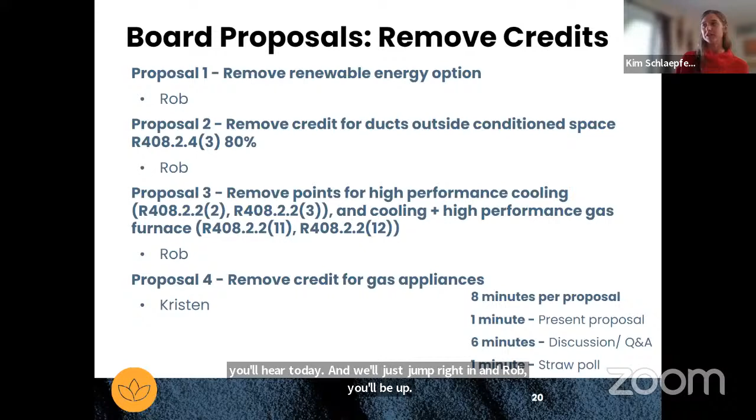So this is an overview of the 4 proposals you'll hear today, and we'll just jump right in. Rob, you'll be up first, but we can go through yours one at a time because they're all kind of different in their outcomes.

My concerns with the renewable energy option are the same as they've been in every other time we've discussed: it really doesn't necessarily apply. It's energy, it's generation, it's not conservation. It's changing how energy is dumped into the system instead of pulling energy out of the system. The interconnections, system designs, and effects it's going to have on the distribution grid, on distribution system design, substation design, are all costs that are unaccounted for. If we do onesie-twosie houses with PV added, that can certainly be absorbed, generally speaking, by the grid. But if we start making this very widespread, it creates upstream challenges for us. So I'd rather the conservation code focus on energy conservation, pulling energy out of the system, instead of how it's dumped into it.

Thank you, Rob. Okay, we'll open it up for Q&A and discussion. Any board members have questions or thoughts on Rob's proposal?

Elizabeth: my only thoughts are, if the board chooses to accept this, you have to make everything else align with it. So if you take away renewable energy as a benefit to this path, it's got to be considered under ERI and R405 as well. Thanks, Elizabeth. Kim?

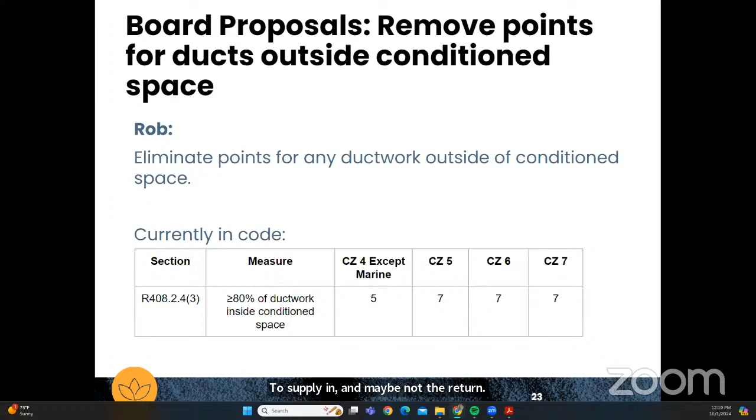Thanks, Elizabeth. Andrew: Just conceptually, the 80% - my understanding was more that potentially a builder could maybe get the supply in and maybe not the return, and that the return may be 20%. I've seen some plans like that. Yeah, good example. Okay, thanks, Andrew. Thanks, Elizabeth.

Other questions, comments on this proposal? Okay, I'm not seeing any hands, so I think we'll move to our straw poll. And I'll stop my timer before it scares me. Okay, so, oh yep, Kim, go for it.

Sorry, just trying to really understand and think about the projects that I've seen as well, where there are some situations where 100% is not really able to be achieved very easily. And just wondering whether a compromise might be to lower the points available so that instead of the points being almost as much as 100% of ductwork inside conditioned space, it's less than that.

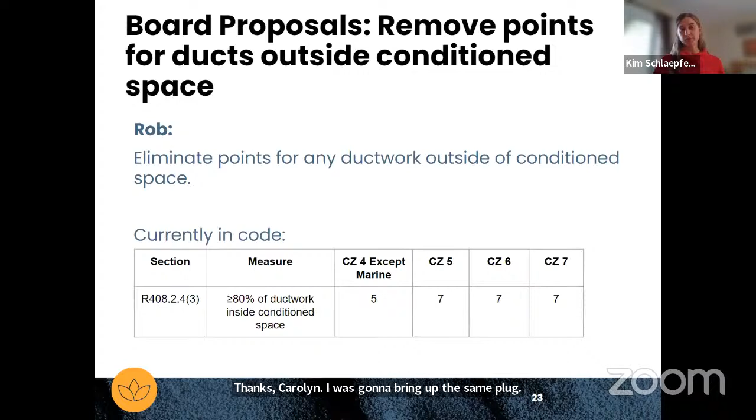I'll just offer the only challenge with lowering the points is we still have to stay consistent with the energy outcome that these are all supposed to be calibrated around. Gotcha. So thank you, Carolyn. I was gonna bring up the same flag. Okay, awesome, not seeing any other hands.

We'll move to our straw poll. So, does the board want to remove the credit option for ductwork outside of conditioned spaces? And again, sorry that the language in this slide is not clear - this is for the 80%. So let me just actually put that in, right, just so we make sure we are very clear, crystal clear on what we would be voting on.

So this would be to strike the 80% option, R408 - so it would be 80% inside conditioned space, not outside. Yeah, thank you, sorry. Okay.

Okay, so option A is to accept this proposal, which would mean striking this as a credit option. Option B is not accepting this proposal, which means the credit option stays in, and option C is an abstain vote. Board members who would like to vote for option A, please raise your hand.

Okay, thank you guys, I see 2 votes for option A. Option B, if board members would like to vote for option B, please raise your hand. Okay, thank you guys, I saw 11 hands for option B. For option C, please raise your hand if you'd like to abstain. Okay, thank you guys, I see 2 votes for option C.

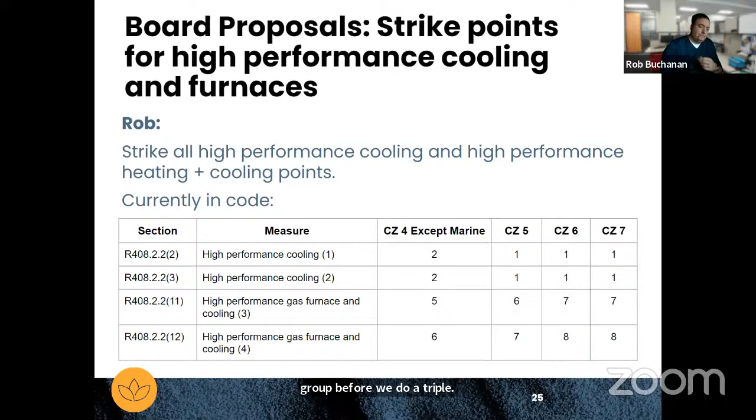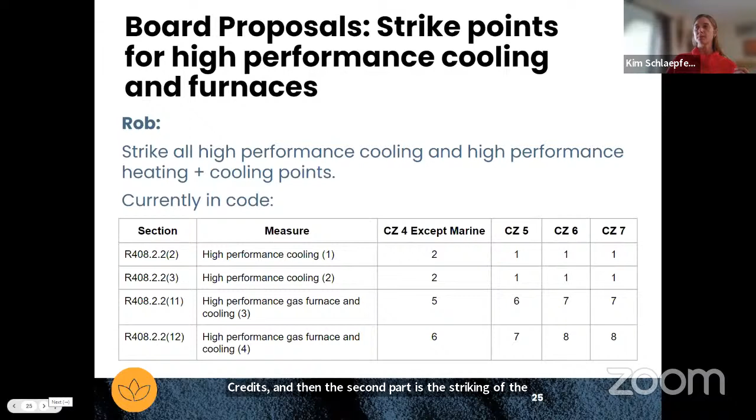Thanks, everyone. I'm not seeing any other hands, so with that I think we will move to a straw poll. We've broken this into two parts: first, striking the high performance cooling credits, and second, striking the high performance gas furnace and cooling credits, since both were included in Rob's proposal. So does the board want to remove the credit options for high performance cooling? Option A is yes, option B is no, option C is abstain.

If you would like to strike the high performance cooling credits and vote for option A, please raise your hand. Okay, I see one vote for option A. If you would like to vote no, please raise your hand. I see 12 votes for no, thank you, you can lower your hands. If you would like to abstain, please raise your hand. I see 2 for abstain, thank you, you can lower your hands.

We'll move into the next part of Rob's proposal, which was to remove the credit options for cooling plus high performance gas furnace. I feel like the majority has spoken, so I can withdraw the next couple. I think I know what direction it's going to go. Okay, thanks Rob. So this question and proposal has been withdrawn.

Next up in removing credits is Kristen. In the interest of time, I withdraw this proposal. Okay, there we go. Thanks, Kristen.

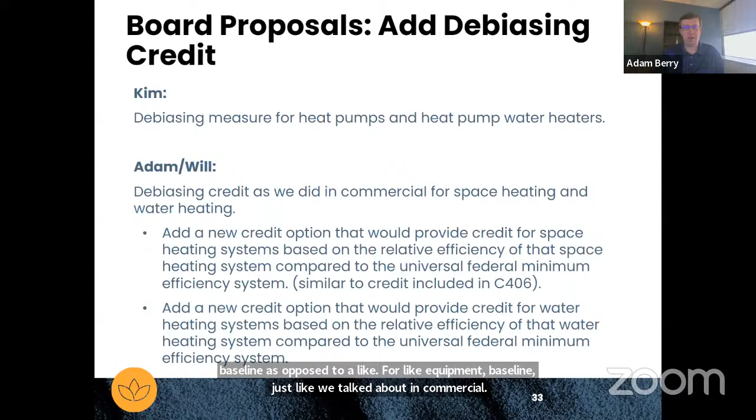Okay, thanks Adam. Kim, anything to add? I think only that there was a proposal from RMI that supported this measure that could be very helpful.

Awesome, thank you Kim. So I think what we'll do is just open up the floor for questions and discussion. If folks have any questions for Adam or Kim, or would like to share their thoughts on this proposal, please feel free to raise your hand.

Kristen: Question for Kim. How would you like to incorporate some of the suggestions from RMI? And it seemed like they had a coalition of supporters on that letter too.

I'm not sure that I can answer that question right now without looking at it in more detail, because from reading through it and discussions with RMI staff, they seem to have a whole lot better handle on how to incorporate or suggest what to do here than I could have come up with. So I was just kind of referring to what they had proposed in my suggestion. Thank you.

Thank you both. Kim, can you remind the board whether that proposal was found in the public comment form or the board proposal form? Oh gosh, I believe it's the public comment form, and it was kind of in the middle, like comment 10 or 11 or so. Thank you, Kristen.

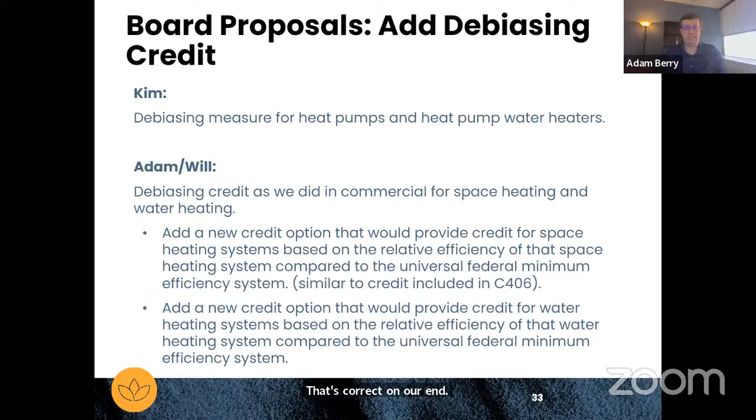Okay, so the first question is, does the board want to add a debiasing credit for space heating? I will say, without the specifics, this straw poll would be to give guidance to our team and CEO to figure out what this looks like, leveraging the RMI proposal and baking it into the first version of the code for you all to react to. So just keeping it at that higher level right now, this is just direction for us to include debiasing and figure out what that looks like.

Andrew: Yes, good morning, question - I'm sorry, I was a minute late getting back. So for any credit conceptually, would everything else have to be de-weighted for any additional credit? Is that the intent, or is that a TBD?

I might ask Adam and Kim, based on RMI's proposal, if you think that would be the outcome or not. I don't know that necessarily other credits would be de-weighted. I think that this might, and we might have to, if the board agrees to do this conceptually here, similar to what we did in commercial - I think there's not as clear cut of a path to do this, because there are so many different heating and cooling credits in residential, whereas in commercial there was relatively one that made sense to align this with.

So Andrew, I guess we might need to hold off on answering that question holistically right now, but certainly we will reflect on that before the draft that we send you all. And if there are concerns about needing to adjust other credits to accommodate this, we can certainly visit that at that time.

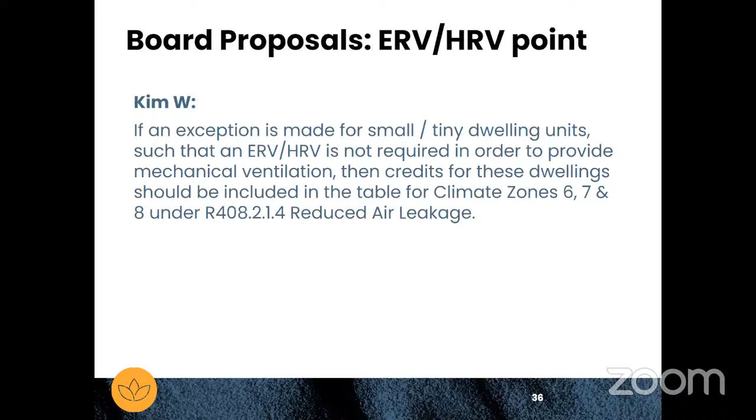And then my question would be, why is it just for 6, 7, and 8? So this would not even be applying to Broomfield or Front Range 5. It's for 6, 7, 8 because those are the only regions that get the points in the table. Those are the only climate zones in which an ERV or HRV is required by the code.

There we go. Thank you, Adam. Okay, thank you. Thanks, Tim. Ron, and then we'll go home.

Thank you. So I guess the ventilation air is essential no matter what size the house is. And so I think it's really important that we don't do things that reduce the likelihood people are going to have these systems or use these systems. I think the Lunos is actually a really good solution.

There's also a couple of major manufacturers like Panasonic that make very small freestanding self-contained units that are kind of like slightly oversized bath fans, but with a single hole. They're really easy to use and they work great for small spaces. They're not as efficient as the full-size systems, and they're not perfect by any means, but there are technical solutions out there for tiny homes.

Since we are seeing more and more interest in tiny homes, I'm expecting manufacturers are going to be putting out devices that work with these things, especially by the time this code gets to really hit the streets. I'm expecting to see most major manufacturers have devices that'll work in tiny homes, even more so than they already do. So I would say that this is something we should keep in the code.

And maybe I can clarify, my proposal for 403 is not to remove that there's a mechanical ventilation requirement. It's just to add options for the tiny homes. But I also recognize the efficiency of ERV and HRVs, and if there are not enough options out there on the market that people can choose, then I would withdraw the proposal. But I do agree with Tim that maybe this conversation is best held when we talk about the proposal for 403, because it could be a moot point.

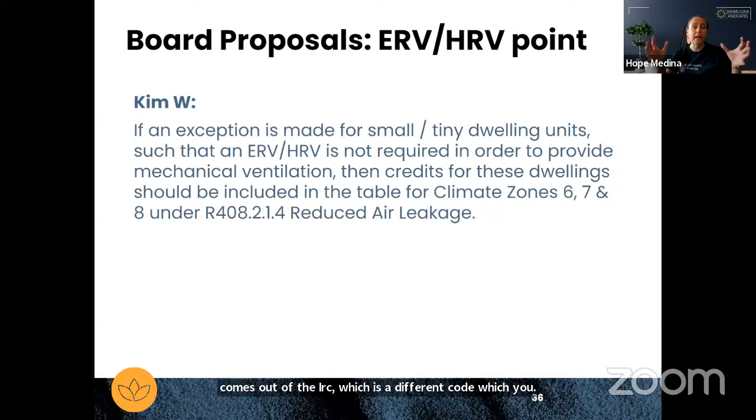The requirement for whole house mechanical ventilation comes out of the IRC, which is a different code, which you do not have purview over. And they have very specific items in there to make sure that we're getting the correct ventilation and the ventilation that's needed for the various sizes of homes. And it's the amount of ventilation and so forth really is dependent on the house size or dwelling unit. So I caution you that you could inadvertently really be messing up other areas and other codes and causing more problems than what was, good heartfelt intentions trying to do.

Thanks, Hope. So synthesizing what I heard from the board, it sounds like, Kim, maybe we move this proposal to a follow-up question to the proposal you made in R403, flagging that since we're moving to a home size discussion next meeting, we may not get to discuss that. We'll likely need to send a follow-up survey on these questions, but we'll move this question and proposal there and continue on. Sounds great. Thanks, Kim.

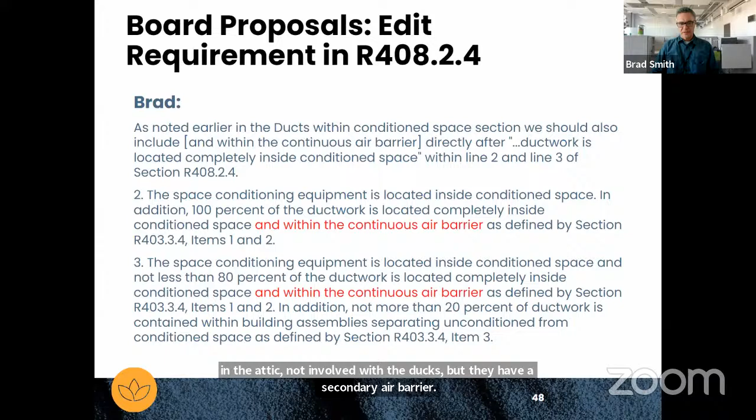Ron? I just want to ask, would you be open to saying within a continuous air barrier? Because what I'm worried about is people are going to get tripped up because the main air barrier is not up in the attic, not involved with the ducts, but they have a secondary air barrier. I think that stays within the intent, Ron. Yes, I would be open to that. There shouldn't be more than one air barrier in the house, though.

You can have lots of air barriers. You don't want more than one vapor barrier.

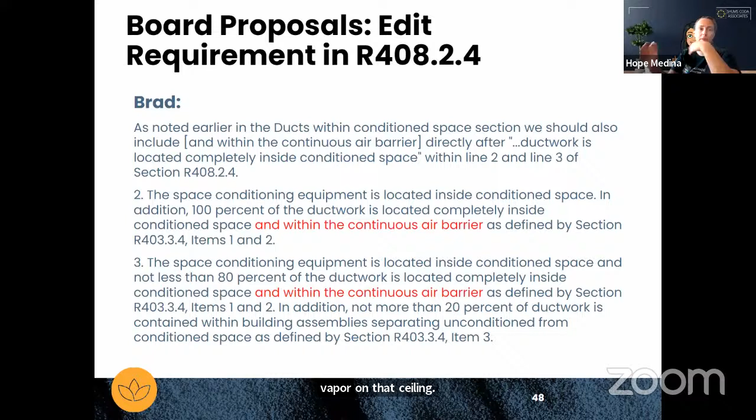Which brings up my concern when you start talking about making sure that somebody doesn't just utilize plastic up on that ceiling, because depending on how you're doing that attic, if you put that vapor barrier on that ceiling location, you can have some issues with it. So just throwing that out there.

Yeah, I guess at this point I'm sort of hesitant to deviate too far from the definitions being used in the Zero Energy Ready Home program. I think those were carefully thought out, they seem to be working, and we've been using them in Boulder County for a long time. I could imagine this confusing things, with people doing things without proper understanding of what they're doing, and creating some really unfortunate situations if the community isn't used to how to think about this.

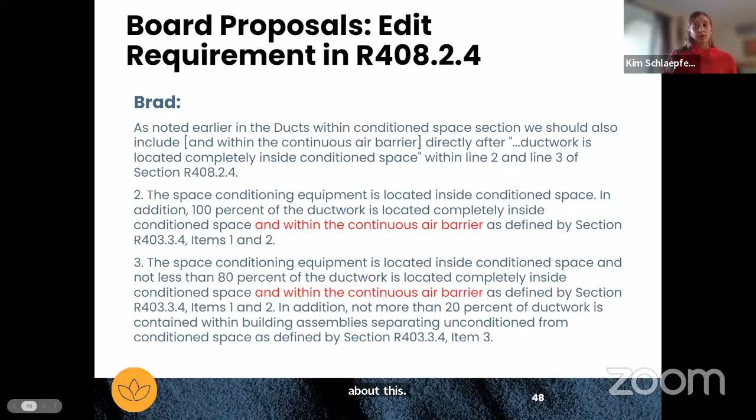So moving back to our straw poll: does the board want to include the continuous air barrier within the proposed sections? A vote for option A is yes, you would like to include this language. A vote for option B is no, you would not like to include this language. A vote for option C is to abstain from the vote. So if board members would like to vote for option A, please raise your hand.

Okay, I see 2 hands. Thank you, you can lower. If board members would like to vote for option B, please raise your hand. Okay, I see 9 votes for option B. Thank you. And board members who would like to abstain from this vote, please raise your hand. And I see 3 abstains. Okay, so the majority is to not accept the proposal.

So thank you guys for the question and discussion. So we're going to move now into our final section on changes to existing credit points.

And Adam, oh sorry, my timer went off to keep everybody focused. Adam, I wanted to ask you again, I think a couple of these proposals are from Carolyn, and if we eliminated those we might be able to get through the straw polls on the rest of these. Any thoughts on if we want a straw poll or just do the board proposals for this final section?

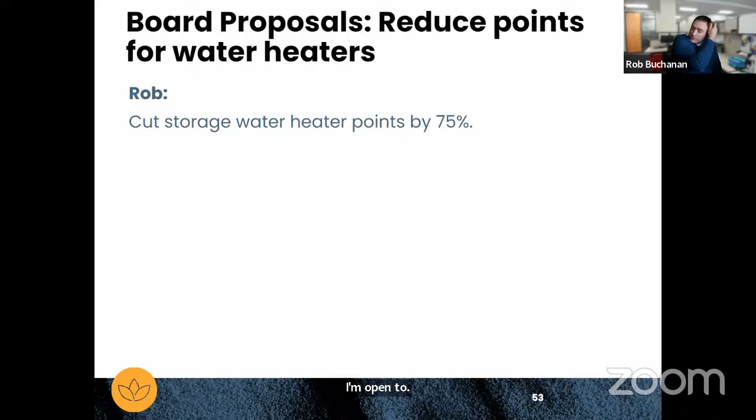Storage water heat - I'm open to getting feedback from my fellow board members on if they feel that it does.

Okay, thanks Rob. So yeah, let's open up board discussion questions. We'd love to know folks' thoughts. So Tim, we'll start with you.

Yeah, thanks Rob - and you said this, I missed it, but what would the points start out? What are they currently, and then reduced to 75%, what would they be?

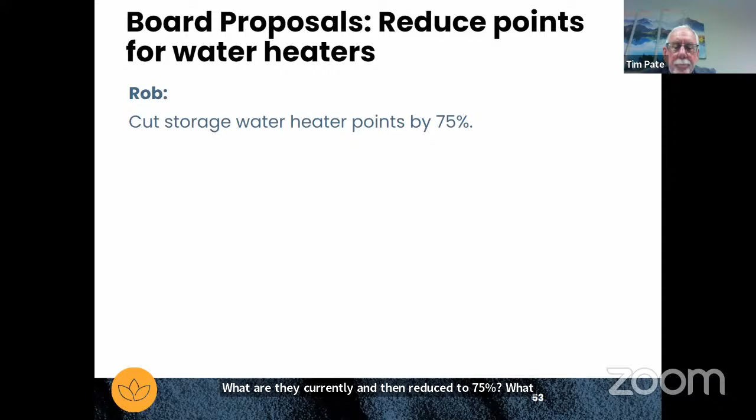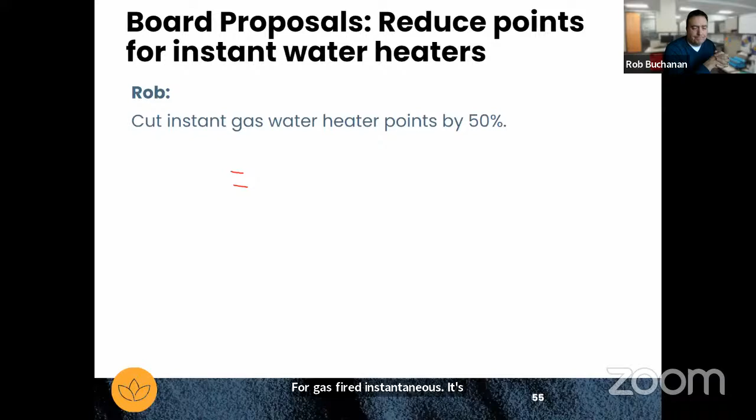I mean, we might as well have the whole discussion right now. Yeah, for gas storage water heaters, it's halving the points, and for instantaneous gas-fired water heaters, it's cutting points by 50%. Again, that's an attempt to start normalizing their UEFs.

Give everyone a second to process. And as you guys have thoughts or questions, raise your hands. Kristen.

Thoughts on the load shifting potential of storage water heaters and how to make sure that doesn't get lost in this. Overall, I agree with your points.

To be clear, Rob, your proposal doesn't address electric storage water heaters though, right? The electric storage water heaters, the 5 options that are on there would remain untouched, correct? Right, thanks. I guess 7 options would include storage. Yeah.

I think, as a utility, we're interested in the load management opportunities, but I don't think that's directly addressed within the code. Well, it's beyond the scope of our discussion right now. How about that?